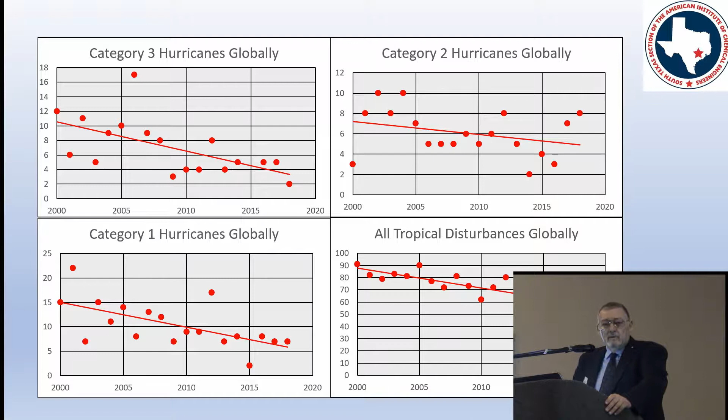So this is worldwide. Category 5 hurricanes are on the increase. Category 4 hurricanes are on the increase. Category 3s are dropping. Some of them must be turning into 4s or 5s. 2s are dropping. 1s are dropping. So what's the overall story? All tropical disturbances globally are dropping. Since the year 2000, we have about 30 fewer tropical disturbances globally. So that's curious. We're having more Category 5s and Category 4s.

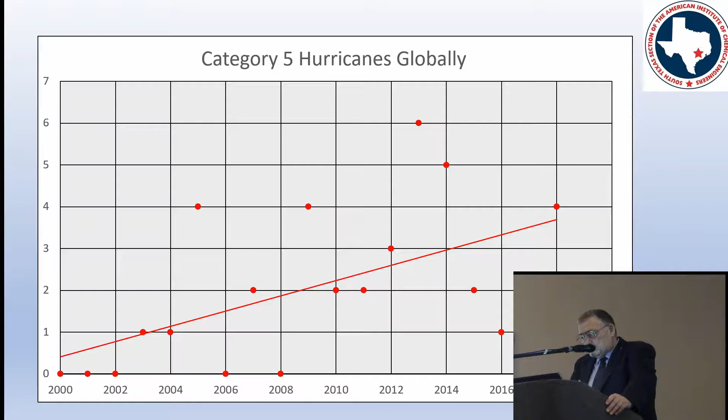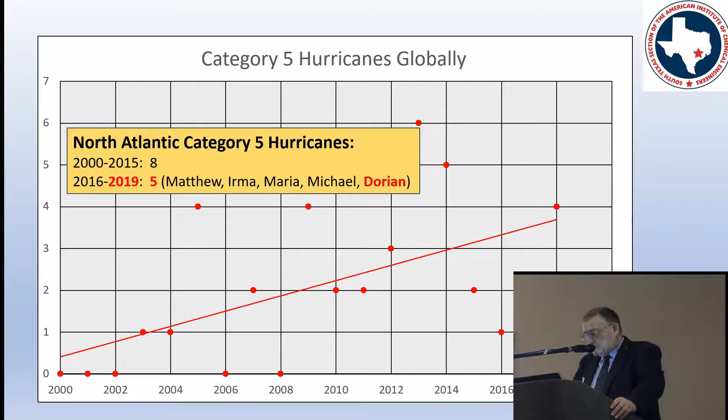These are the Category 5s from 2000 to 2018. For the first 16 years, we had 8. For 16, 17, and 18, those 3 years, we had 4. Throw Dorian in, and we've got 5 over the past 4 years, and of course we're not done yet this year. The reason, when I first saw Dorian way out in the Atlantic, I thought, my gosh, that has a long path length to get to the States. There's a lot of warm water out there.

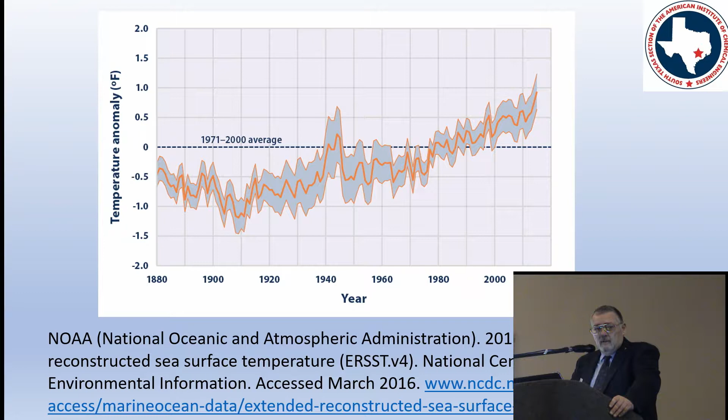Look at this increase in temperature just since the 60s. It actually mirrors the atmospheric increase in temperature pretty closely. That's about, it's over a degree, maybe about 1.4 degrees. So if we have a long flow path length for a tropical disturbance, you can guarantee, I think you can put some money on it, it's going to be a bad storm.

Now I want to talk about where we're at in climate solutions. You may know that I, along with some colleagues, got the approval of the Board of Directors of the American Institute of Chemical Engineers last October to form the Climate Solutions Community. Well, it takes a long time to get something done at a global level, and headquarters has a lot of things on their plate. So it's slow. So I and several colleagues locally, not all chemical engineers, there's a physical chemist, a couple of petroleum engineers, and there are 12 of us to start with. Now there's 18. We formed Climate Solutions for Texas. I'll tell you a little bit about what we're doing.

An engineer from Nigeria came to a Climate Solutions workshop in New Orleans at the spring meeting. He went back and started Climate Solutions for Nigeria and is seeking government approval as a non-governmental organization. In July, I attended a Carbon Management Technology Conference in Houston, met an engineer from Illinois who just had an urge to do something about climate change. On his own dime, he came down. He's sort of a semi-retired guy. My wife and I happened to go up there in the Chicago area in August because my wife is from there, and I met with him, and he is forming Climate Solutions for Illinois.

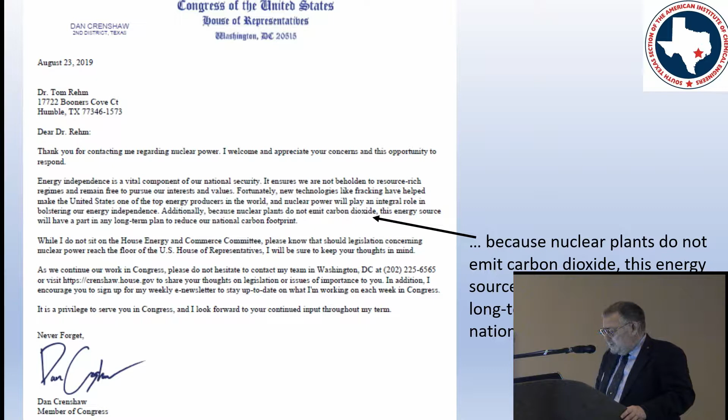I just want to point this out, and I'm going to show you in just a minute that headquarters is in line with us having a political stance. About a year ago, I spoke with Dan Crenshaw. I'm in his congressional district. He's the guy with a patch over his eye, and he asked me, why don't we use nuclear for baseload? And so we talked about that, and there was a town hall meeting just a week or two ago, and he sent me this letter afterwards. He's a Republican. I hope he leads.

Well, it's hard to believe, but this is an email from a lady who's on the AIChE Public Affairs and Information Committee, and she wanted to know what we do regarding government relations in our section, and I didn't think we did anything, and I learned that in previous years we had involvement. So it's interesting to me that they are encouraging that.

When Climate Solutions Community launched in the spring, on March 31st, the AIChE issued a press release, and this was part of it. A key task assigned to the Climate Solutions Community Steering Committee will be to develop a portfolio of technical and government policy solutions necessary to address both industrial and societal challenges related to climate. So we've got the okay to get into policy. Of course, they want some oversight over that.

Whew. That was all I had on climate solutions. I tried to get through it fast so we can get on to other stuff.

Southwest Process Technology Conference. If you haven't registered for it, you're in luck. All those here tonight are going to get a break on the registration. I'll explain that in a minute. It's local to Houston this year, Sugar Land, so we're hoping for a big turnout. There are going to be 9 sessions, as you see there. One of them climate solutions.

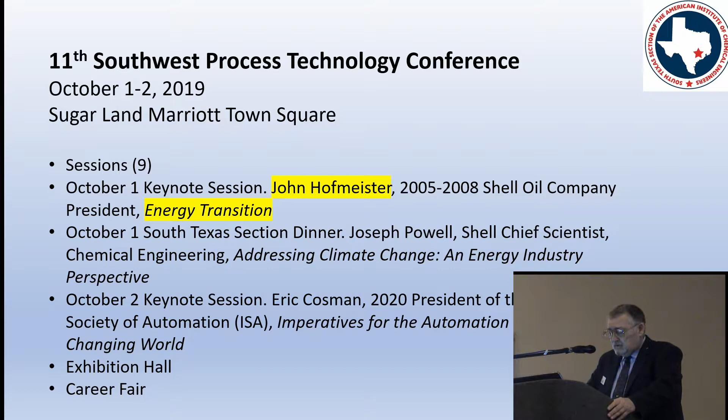Our keynote speaker the first day is John Hofmeister, the Shell Oil Company president, 2005 to 2008, and very, very concerned about climate change. And he's going to talk about energy transition. Joseph Powell, one of our section members, Shell Chief Scientist in Chemical Engineering, is going to speak at our October 1st dinner meeting addressing climate change, an energy industry perspective. And October 2nd, Eric Cosman, 2020 president of the International Society of Automation, is going to speak about automation. And we'll have an exhibition hall and a career fair.

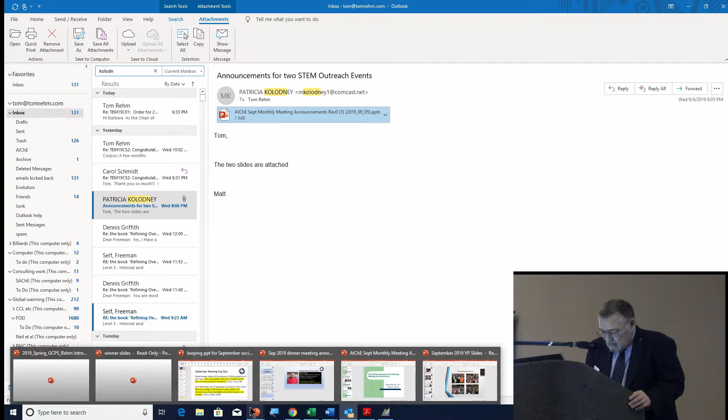Let's see. Yeah, well, okay. Let's see how we go forward. This one here. Okay, yeah, thank you. Okay, well, thanks, everyone.

We have two K-12 outreach activities coming up. The first one is going to be the Sally Ride STEM Festival, Saturday, October 12th at Rice University, and you can see the hours.

Wait, why does this keep moving? Okay, I'm the contact person for it. These are a couple of pictures. We get girls from basically middle school age, and it's great. You get to work with them; here's a picture from a couple years ago.

And then the other is Energy Day, that's the Consumer Energy Alliance, and it's going to be at Sam Houston Park downtown. The lunch and parking costs will be reimbursed. This is the chair of the Consumer Energy Alliance, inviting our volunteers back to the event. Last year we had about 1,000 kids come through, and we had a great time showing them our exhibits. So anybody who's interested in either of those, please get in touch with me.

Thank you. Okay, thanks, Matt. Okay, so I'm going to put up the speaker's presentation and then introduce him here. Okay. What did I forget? I know I got it on here, Mike. There it is right there, it's on my desktop.

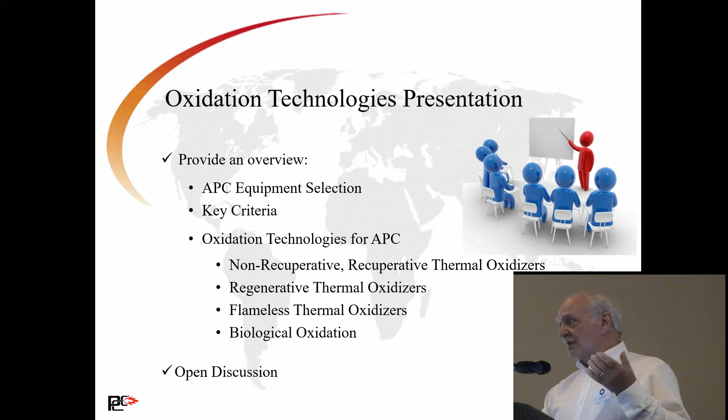Our primary focus is the treatment of VOCs, volatile organic compounds. Along with that, we have to look at NOx, SOx, and all the various offshoots and byproducts of combustion technology. But the technology's primary purpose is to put our customers or end users in compliance.

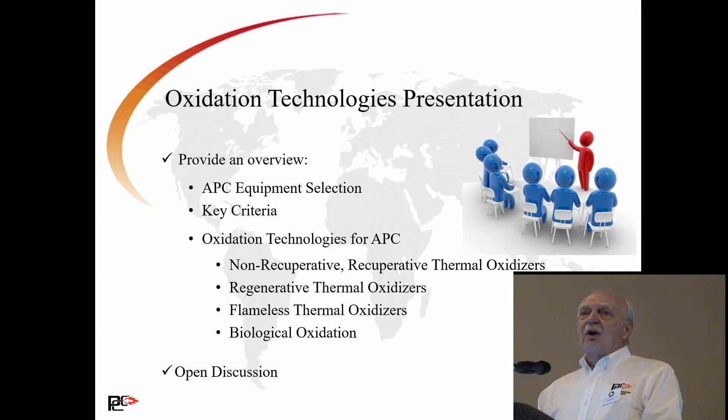So really, when you look at APC equipment, one of the key things you have to consider is the temperature at which oxidation or combustion will take place. It's easy to determine that temperature. You can look up the compounds. You take that complete list of compounds found in the airstream, and the first thing you do is identify the worst case - what is going to be that highest temperature needed to achieve the destruction you need?

Now, the second part is, okay, I know the temperature, but what technology, what system, what methodology do I use to achieve that temperature? That's as critical, or probably more critical, than the temperature itself, because there are a lot of different ways of getting to that temperature. Nowadays we have to concern ourselves with fuel efficiencies, NOx emissions, SOx emissions, greenhouse gas emissions. So the old days of just a burner and burn it out, the flame in the can - there's a lot more that goes into it than there did 10, 15, 20 years ago.

So really what you're looking at is you want to design a thermal oxidizer that's configured such that it promotes the total reaction of the air pollutants plus oxygen at an elevated temperature. What this does is result in total elimination of the waste compounds, and you end up with carbon dioxide, water, and some heat.

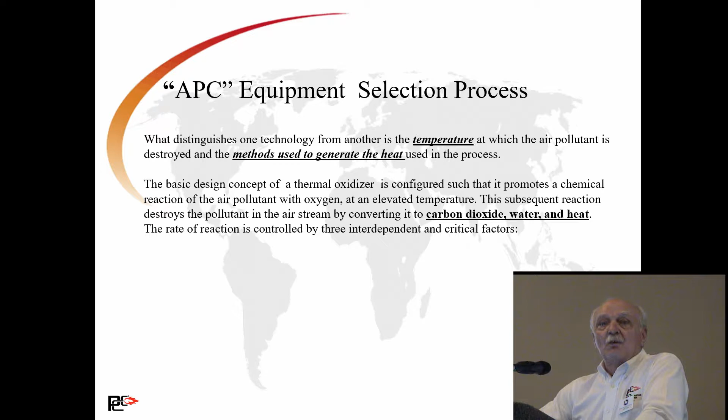So when we look at this, there are really three criteria we concern ourselves with. This is called the 3 T's of combustion, and they're common regardless of what technology you're using. The first is time - how much time at temperature does it require for your oxidation or combustion reaction to take place? Very critical, because time is the primary element in determining the size of the system, and size relates to cost, as you can imagine. The next is temperature - we talked about temperature, okay?

You have to be at a given temperature, sufficient enough to promote a complete oxidation or combustion reaction. The third is turbulence or mixing. And in a lot of cases, this is the one area that is often overlooked, or not as much emphasis is put on it. If we don't properly mix that waste gas stream with the air or supplemental natural gas we're adding, we're not going to have a complete oxidation or combustion reaction. And if we don't have a complete reaction, two things happen: we're not going to hit our performance, the destruction removal efficiency we're looking for, and we're probably going to consume more supplemental fuel, resulting in a higher operating cost. So the 3 T's are really, really critical: time, temperature, and turbulence.

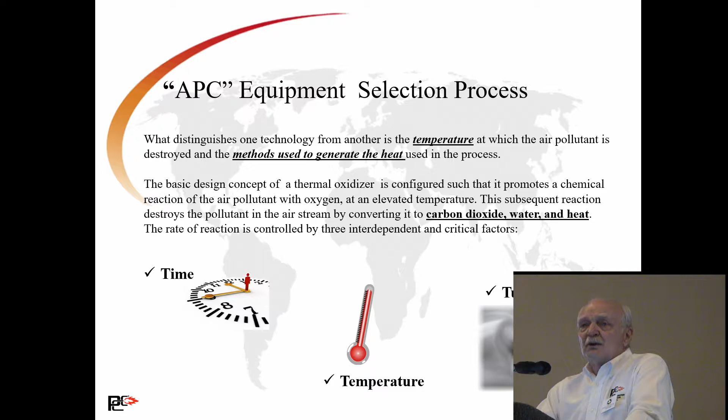So when we look at the basic design criteria for most thermal-based systems, you have a temperature of 1400 to 2200 degrees F. It's not often, unless you're using a catalytic oxidation system, that you're going to be below 1400 degrees. There are instances when you need to be over 2200 degrees. The average is probably in that 1500 to 1700, maybe up to 1800 degree F temperature range.

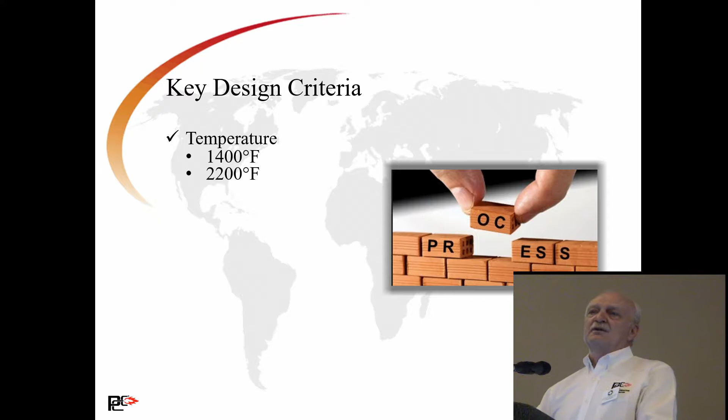Residence time: when we look at residence time on most conventional technologies, you're going to find that it ranges from half a second to 2 seconds. So this is the time that you're in the combustion chamber, or the area where the actual combustion or oxidation reaction takes place.

Gas velocity, anywhere from 15 to 50 feet per second. In some cases we can go higher. Other suppliers, depending on their design and how their systems are set up, can go higher. But this is pretty much the typical range.

To complete the oxidation reaction, you have to have a minimum of 2% by volume oxygen present. If you don't have oxygen present, you're not going to complete that oxidation or combustion reaction. So this is the basic design criteria utilized when designing a system. You need to determine that temperature, look at how much time it's going to take to fully oxidize and combust those compounds, have oxygen present, and make sure you've got good mixing.

This is applicable across all of the basic thermal oxidation technologies. A lot of this applies when you get into biological systems as well, but you look at it a little differently, and the operating parameters are totally different. You couldn't have a biological system operating at 2200 degrees F - there would be no bugs alive at that temperature, at least none that we work with.

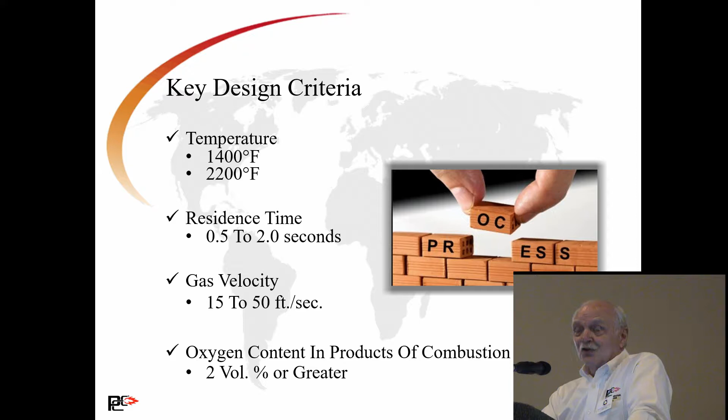So in the simplest of terms, what is a thermal oxidizer? Typically, when we refer to a thermal oxidizer, the most common term is a direct-fired thermal oxidizer. So a thermal oxidizer is a thermal reactor where pollutants in a waste stream are heated in the presence of oxygen to a temperature sufficient enough to convert the pollutants to harmless compounds - once again, carbon dioxide, water vapor, nitrogen, and oxygen.

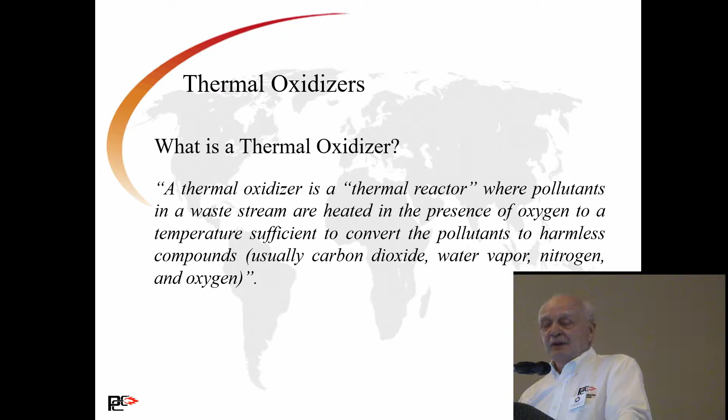So when you look at this in the very simplest of terms, really what you have is a flame in a can, okay? You have a fuel source, a burner, you add supplemental oxygen, you bring your waste gas stream in, and you create a scenario where you're properly mixing that. Your combustion chamber, the flame, burns into the combustion chamber. The combustion chamber is sufficient enough to give you the required retention time that you require, and then you exhaust to atmosphere. Very simple, very basic.

They can be extremely complex. It depends on the compounds being treated. If you have very low NOx requirements, there are various things you can do to the flame in the can, so to speak, to reduce the NOx. One of the big issues is they're not the most efficient in the world from a thermal fuel usage standpoint, and one of the reasons for that is you're generating a lot of heat, but you're not doing anything to capture that heat. So that's one of the areas.

One of the big advantages of a system like this is you can achieve 99.99% removal efficiency - very, very important. A lot of permits are written and require that 99.99%.

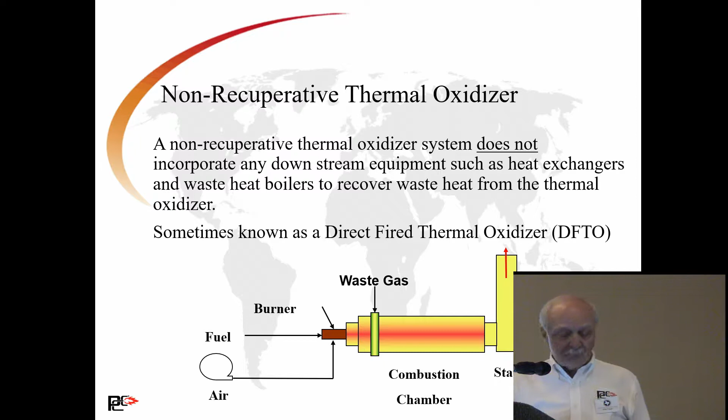When you look at typical applications, you want something where the waste stream is exothermic. In other words, the waste gas typically has a relatively high BTU value, so you're not supplementing it with a lot of natural gas or other auxiliary fuel. The stream can be wild, meaning there can be a certain amount of variation to it. A lot of auxiliary fuel is not needed. You're really not concerned with the materials of construction—they can be loaded with particulate, they can be dirty. You just don't have a lot of concerns for that.

Fuel is typically not a major concern with the customer because they're either going to burn fuel or augment it with fuel. Due to the lower efficiency levels, the real concern here is removal efficiency and meeting their permit requirements.

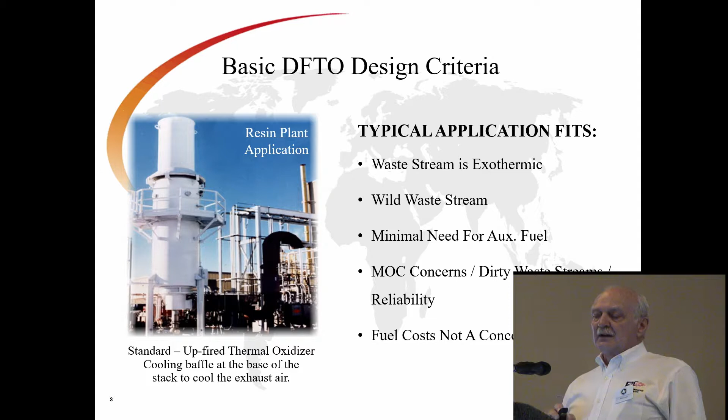Now keep in mind that you're evacuating 15, 16, 17, 1800 degree heat to the atmosphere when running a direct-fired thermal oxidizer. So what most people and most systems employ today is some sort of recuperative technology, where you take the waste heat that's being generated and do something with it. The most common application is a waste heat boiler.

Just about every factory uses steam in their process in some form or fashion, and most of them are burning natural gas to generate that steam. So if you take the waste heat coming off of a thermal oxidizer and run it through a waste heat boiler, you're now utilizing that heat to generate steam. You're able to either shut down that natural gas burning boiler, or augment your steam capability within your factory. So now you're utilizing that heat to do something else—steam is the most common.

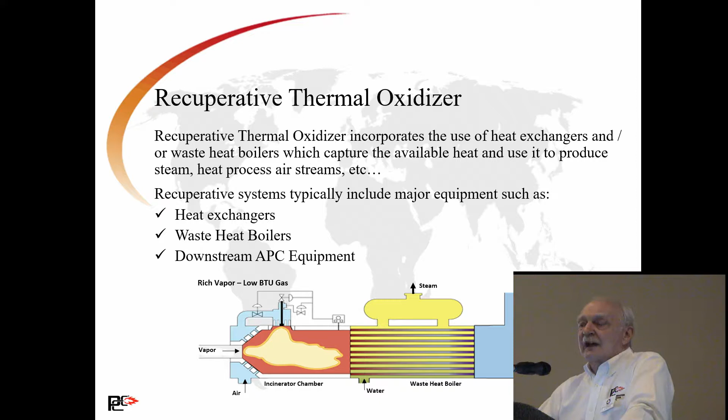You can preheat the air to reduce the delta T required to bring that waste gas up to temperature. You can have air heaters in the asphalt business or roofing business—they use oil heaters to preheat the asphalt itself. So they're not using some ancillary heat; they heat oil lines, put it into the vats of asphalt, and heat it that way. There's a tremendous number of uses for that heat, and a lot of different equipment out there. Once again, waste heat boilers are probably the most common that you'll find on thermal VOC removal or thermal oxidation technologies.

The typical application would be one where the waste gas is either exothermic or endothermic. You're really not as concerned with a high BTU value, because if you're supplementing it with auxiliary gas or fuel, you're achieving a benefit—utilizing that heat to do something else within the factory. Obviously, you're not going to add a waste heat boiler or other ancillary equipment if the customer doesn't have a use for it. They're very expensive, and oftentimes a waste heat boiler can be as expensive as the thermal oxidizer itself, depending on the size and how much steam you're trying to generate.

The application should not present an unmanageable fouling or corrosive concern. The obvious reason is you're using a heat transfer technology. If you have a lot of particulate or other compounds that foul the thermal transfer capability of the auxiliary equipment, you'll lose that heat transfer capability and minimize its overall effectiveness. So you want a relatively clean, non-corrosive airstream going into that ancillary waste heat recovery system.

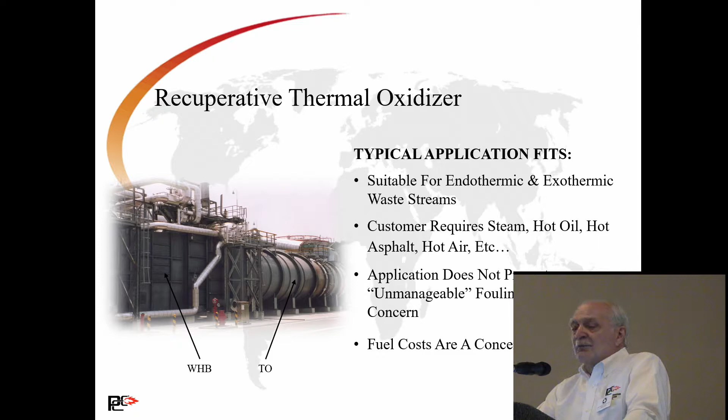Typical, that's a duplicate, sorry.

Okay, the next technology is what we call a regenerative thermal oxidizer, or more commonly known as an RTO out in the field. RTOs are similar to a standard direct fired, but really what we're doing is we're capturing the heat and we're going to utilize that heat. And as a result, they're very, very thermally efficient. They're 95% thermally efficient. The best you're going to get, even with a recuperative thermal oxidizer, is maybe 80% heat recovery or thermal efficiency. Here, you're at a 95% thermal efficient.

They're typically used for high volume airflows at low volume concentrations of VOCs. So typical applications most people would be familiar with are paint booths in the automotive industry, where you have hundreds of thousands of ACFM of air being moved, but very low VOC concentrations, because there's a lot of scrubbing and a lot of recovery that takes place, but you do have low volume VOC.

In the engineered wood products, your OSB, your MDF, your plywood, your particle board applications, once again, on the press and dryer vents, you have very, very high airflows, ranging from 100,000 to, I've seen it as high as 400,000 CFM, but you have very low VOC content. So these systems are a natural for that. They're very, very, very effective.

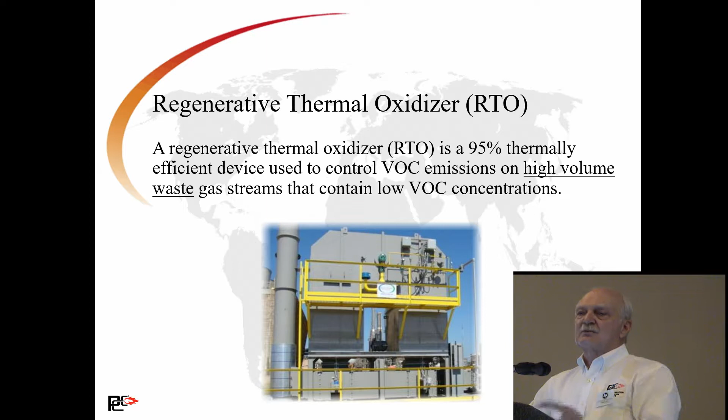So really, when you look at a regenerative thermal oxidizer, what you have is an oxidation zone, and your oxidation zone is basically a horizontal thermal oxidizer, so to speak. You have a flame, you're heating that oxidation zone or that combustion chamber up to a temperature that's sufficient enough to remove the compounds in the air. Let's say it's 1400, 1500, 1600 degrees F.

This is where you start to get different from the more conventional systems. Now you have two zones that are made up of ceramic beds. They can be a block ceramic bed, or they can be what are called saddles, so just random pieces of ceramic that are put into the beds. These are heat recovery beds, so you're recovering heat and you're releasing heat, and that's the purpose of these beds. So once again, you're either going to recover heat or you're going to release heat, okay?

The next thing you have are switching valves, and there's all types of switching valves used in regenerative thermal oxidizers. Probably the most common are called poppet valves, but there are indexing valves, there's rotary valves, there's all kinds of valves. But the key is it's a valving mechanism that switches the airflow.

So you're going to directionally change the flow of the waste gas, and you're going to move it from one side to the other. A typical indexing or cycling would be in the order of 45 seconds to 3 minutes. And it all depends on the construction of the system, the compounds you're treating, the heat requirements, and the heat transfer capability of the ceramic media that you have in the system.

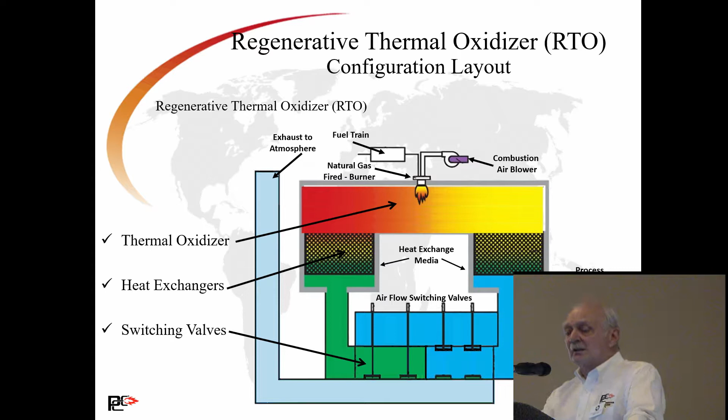So when we look at a flow diagram, initially when you start the system up, you're going to preheat that ceramic bed, in this case in flow 1, so ceramic bed 1, which would be this bed here. So as the waste gas enters, the valve diverts the waste gas into ceramic bed 1. That bed is hot, okay? It's probably 900 to 1,000 degrees F, okay?

What happens is your waste gas is at an ambient temperature, whatever that might be. So what we want to do is preheat and draw heat from that bed, transfer that into the waste gas. So now we're elevating the temperature of the waste gas as it goes into the combustion chamber. So we may have that waste gas at 700, 800 degrees going into that combustion chamber, so you have considerably less delta T, or temperature change, to reach the combustion temperature.

Okay, the gas then exits the combustion chamber. Now it's hot. It's at 1,500 degrees. You now transfer the heat from that waste gas into the secondary ceramic bed. Now what you're doing is you're heating that bed up to that 700, 800, 900 degrees.

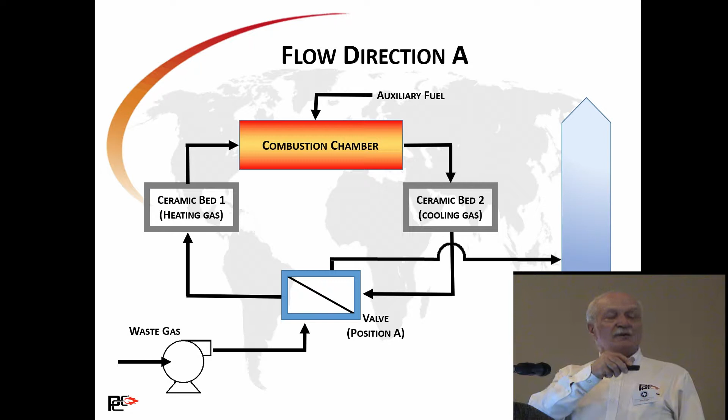Okay, and then you come down and you go back out and you exhaust to atmosphere. So that's cycle one. Now what you do on that cycle, which like I said, could be a minute, could be 3 minutes, it depends on the sizing and the total operation of the system. But now what you're going to do, you're just going to reverse this.

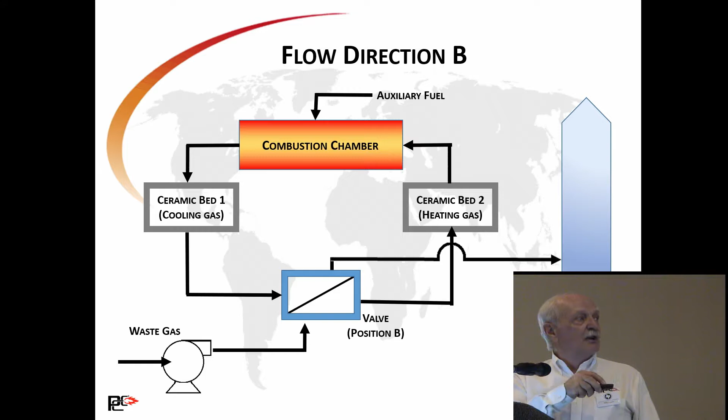So now we're going to go through ceramic bed 2, because that bed's hot. We cooled ceramic bed 1 down. So now this bed's hot, so we cycle up through here, do the same thing. We preheat that waste gas, bring it up to temperature, reduce that delta T. We come back out, we exit through the second bed, or bed 1 in this case. We heat that bed up to the maximum retention temperature that we're going to achieve.

So we cycle back and forth. This happens every minute, every second that the system is in operation, you're cycling on that 1 minute to 3 minute cycle. Here's the big issue with this system. Most systems are earmarked at 98% removal. That's the common that you'll see. You're starting to see a lot of systems that will be billed at 99% removal.

You're not going to get an RTO to do greater than 99% removal. It's not going to happen without, well, I guess if you added enough sections to it and had something that was just massive, you might be able to do that by capturing everything. But what happens with the system is, when you go through the valve, no matter what that valving system is, those valves switch on about a half-second cycle.

So when it switches, it's switching in a half-second, but you have enough waste gas that is exiting the system that's untreated, and that's called puff. Very common term, it's called puff. And there's enough of that waste gas exiting the system that you cannot achieve over 99%. So that's one of the downsides to the system.

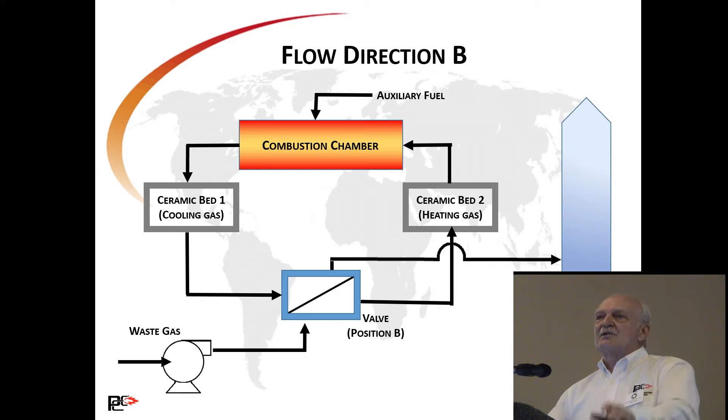And believe it or not, if you're in the business at all, 99%, 99.9, 99.99, these are decimal points, tenths and hundredths of a percent. But that's what permits are written at, and that's what's required. If your permit's written at 99.9%, you have to achieve 99.9 or better. So you have to understand that. And so when you talk about systems of these types and these 0.9s, it's critical. They have a place, they have a use, there's a need for them.

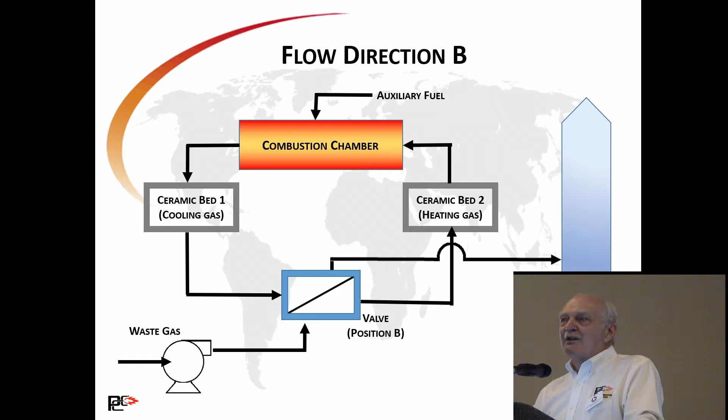So once again, you need to be a high volume, low VOC concentration. You have to have a clean waste stream. We have a ceramic media in there, it will plug. So if you have particulate, if you have silicon-bearing compounds, you can literally glass that media over. So it's got to be a relatively clean waste stream. It's got to be, for the same reason, a relatively non-corrosive waste stream. And you have to determine the quality and the composition of the silica and the silicone within the ceramic media to ensure that you have the proper media in there.

The other thing that's really, really important for an RTO is you have to have a very consistent waste stream. Not a lot of variation. So it's got to be pretty much the same volumes, the same composition day in and day out. And that's where the applications best fit. A wood products application is the same every day, minimal variation. A paint booth application, minimal. Believe it or not, RTOs are used in bakeries, treating ethanol alcohol that comes from the fermentation process and the baking process.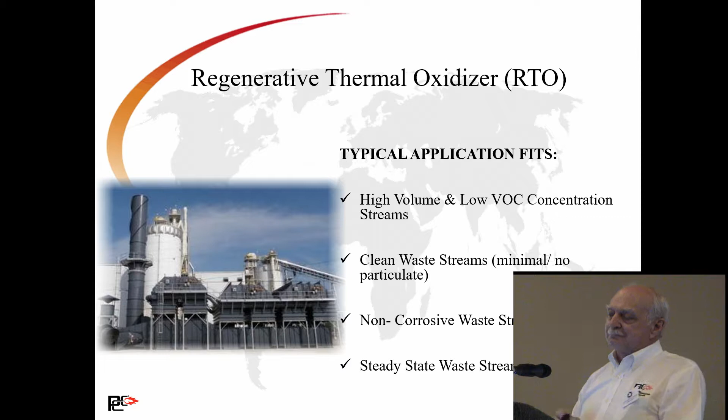They're very consistent. So those are some of the typical applications. So now we're going to get into, we've been talking flames, we've been talking a flame in a can. No matter how you looked at it, it's burning. You're doing something with a flame.

So there's a technology out. It's been out actually for probably 20 years plus. And there was a lot of activity 15, 18, 20 years ago, and then, due to acquisitions of the original company that developed the technology, it kind of got tabled, shelved, and now in the last couple years it's resurfaced.

The president of our company was one of the co-developers of this technology back 20 years ago, and we have made some modifications to it. There are a couple suppliers out there that sell this technology. Not a lot of difference between the two systems, but there are subtle differences.

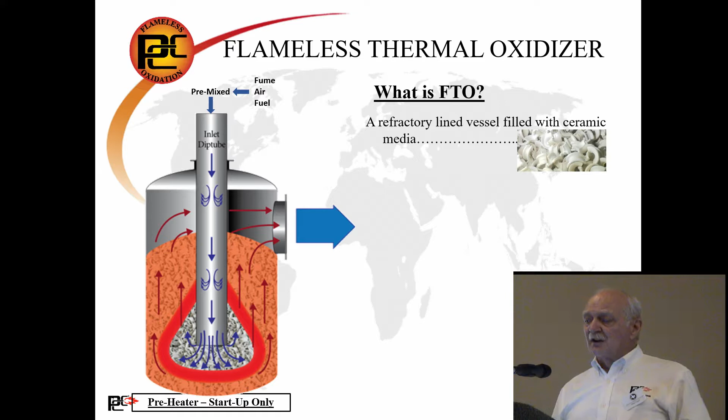But basically, what I want to do is just bring you up to speed on what this technology is from a very generic standpoint. In the simplest of terms, a flameless thermal oxidizer is a refractory-lined vessel. So you've got a vessel that has refractory or an insulation in it, and it's filled with ceramic media. If you can see from the picture, that's a saddle media. Typically, it's a little higher quality, a higher grade than what you would find in a regenerative thermal oxidizer.

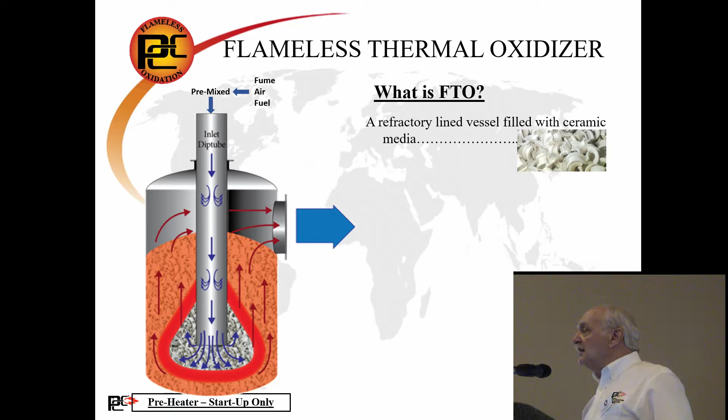So how does the system work? Well, first off, the only time the system will actually see a flame is during the preheat or the startup phase. You have to bring that bed up to 1,400 degrees minimum, which is the temperature that we like to see it at. So you have to have a flame to get it up there. I guess you could put electric heaters in, but they're much slower, much more costly, and are going to take probably a lot more time.

So on larger systems, we use a flame. You have a burner in the bottom, and basically you're just preheating that bed. Once that bed's up to temperature, you start the process. You turn that heater off, and you never turn that heater on again unless you've done some sort of shutdown. Because even if you shut down for a small amount of time, that bed's going to stay at temperature for hours and maybe even days in some cases, depending on your operating temperature, because it's a glowing bed of ceramic.

One of the things that really allows the system to operate and contributes to some of the key advantages this technology has is the utilization of a series of analyzers. So we pre-analyze and then we pre-mix the waste gas. We'll look at the waste gas coming in, and you can throw anything you want at it. You can mix everything in the plant and throw it at it, or you can run 3 different lines today and tomorrow run 4 other lines.

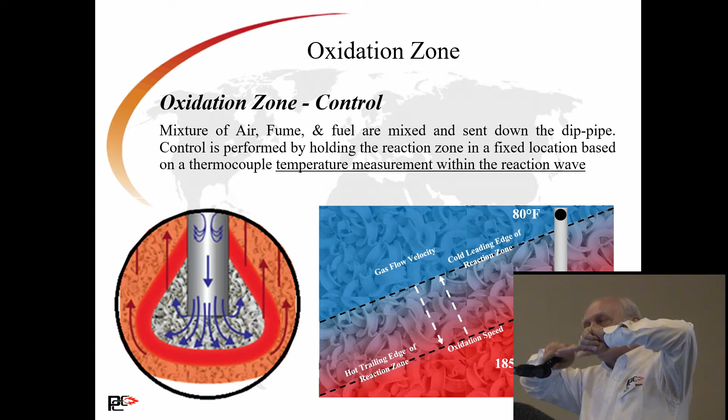But as that waste gas migrates out through that bed, it will start to increase in temperature because that bed is hot, and you'll hit what's called the oxidation zone. The oxidation zone is whatever temperature those compounds are going to oxidize at.

Now remember, I set the BTU value, so I know exactly what temperature they're going to oxidize at. I know exactly how far they're going to migrate out because I know the ambient temperature of that waste gas coming in.

And I'm monitoring all the temperatures in the bed, particularly the lower part of the bed, and I'm monitoring the temperature of that waste gas coming in.

So I control where that oxidation zone is, and that's critical because I want that oxidation zone to be maximum, so I have the maximum amount of surface area for that oxidation to take place.

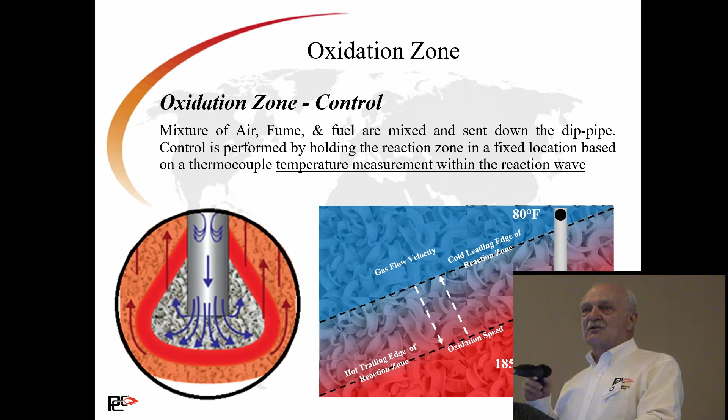And I don't want it moving around within the vessel, because if it moves to one side or the other, or up or down in the vessel, I'm not going to have a complete oxidation reaction, and I'm going to lose efficiency.

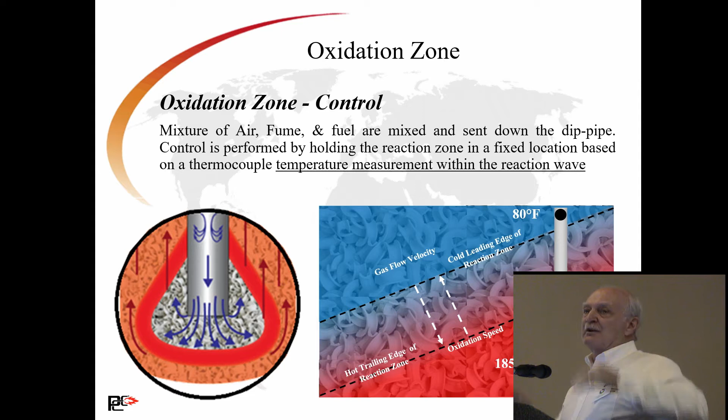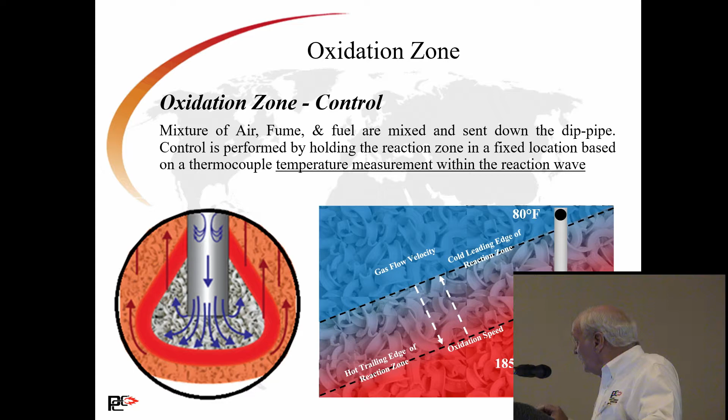So you start out with a cold bed. We have a heater, and we're going to bring that bed up to temperature. It's pretty basic—we're just heating up all that ceramic media within the bed.

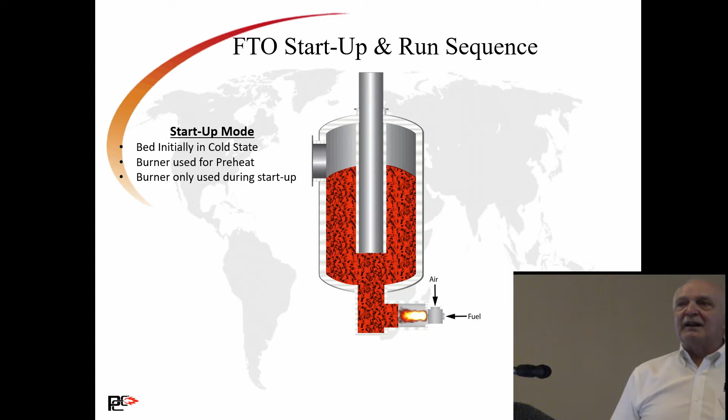When we go into the operation mode, this is where you'll see the waste gas come down the dip tube. It migrates out through that oxidation zone, and you completely oxidize those compounds—probably close to about as complete a reaction as you can get, taking place in that oxidation zone.

The rest of the gas then percolates up through that bed at 1800 degrees, so you have continued oxidation taking place. Anything left, anything not oxidized within that oxidation zone, will now be oxidized as it percolates up through the bed.

And even when you get to the head space within the vessel, that's just like a retention time, or like a combustion chamber—it's at close to 1800 degrees. So throughout the entire vessel, you have oxidation, or VOC destruction, taking place.

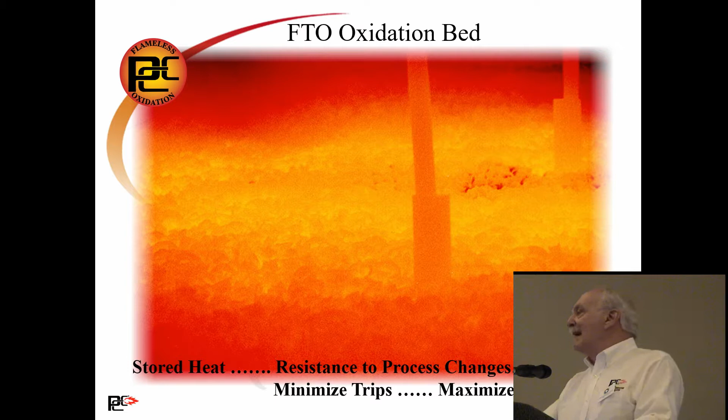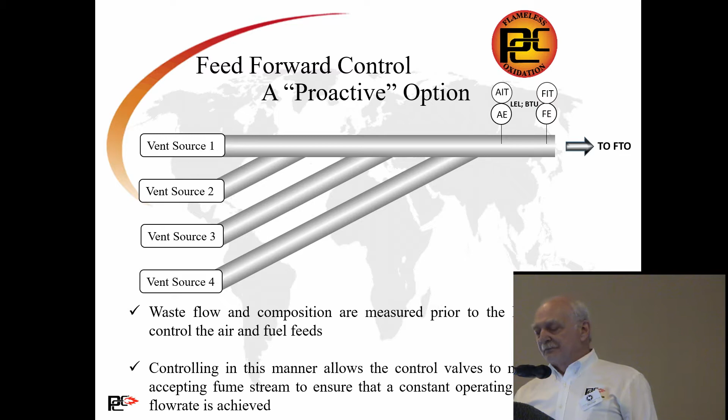So I was talking about feed forward, the controls, and the ability to handle multiple waste streams. In my way of thinking, and when I go out and talk to people, I'm finding that this is more important than a couple of the other advantages this system offers.

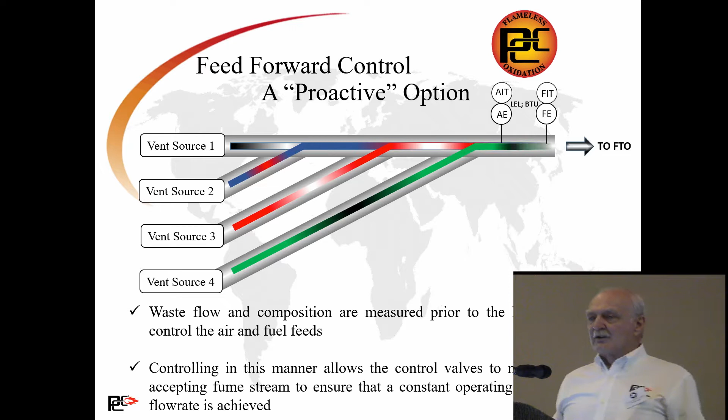Most major companies have multiple waste streams that they have to treat. They need a system that can handle this without having to do significant adjustments.

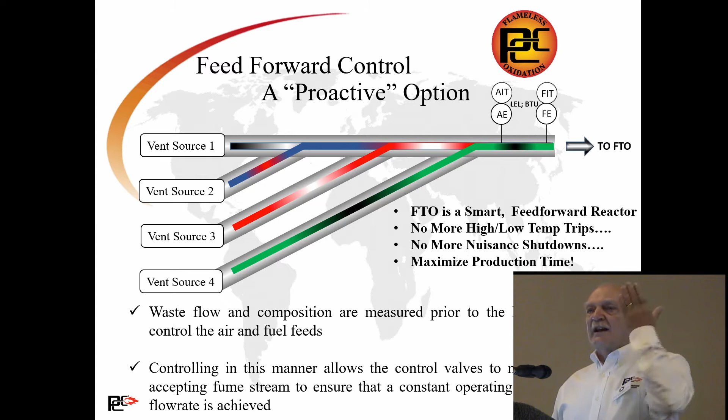A thermal oxidizer—when your waste gas is coming in and you know what it is, you set a high temperature trip, you set a low temperature trip. If for some reason you hit it with waste gas that has a high BTU value, what does it do? Temperature goes up. You hit that high temperature trip and it shuts down. Now you've got to go in, change that set point, account for that higher BTU value gas.

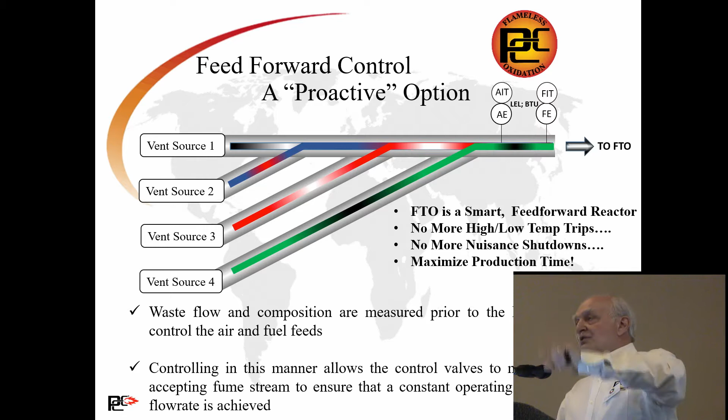Or conversely, if it was a low BTU value gas, it's going to cool down. Then you have to shut down because you're not destroying the compound. So now you're in big trouble, because now you're emitting non-treated VOCs.

Hence, you have a system that is very, very efficient.

We have a customer that spends $6 to $7 million a year in lost product due to high temperature trips. And that's a tremendous amount of money.

Now, when it trips, they get it back online as fast as they can, but that's a lot of money. This system will virtually eliminate that with the feed-forward control on it. So, to my way of thinking, it's a huge, huge advantage.

Are the NOx controls pretty steady with this too? Yes, and I'll go into that. Yes.

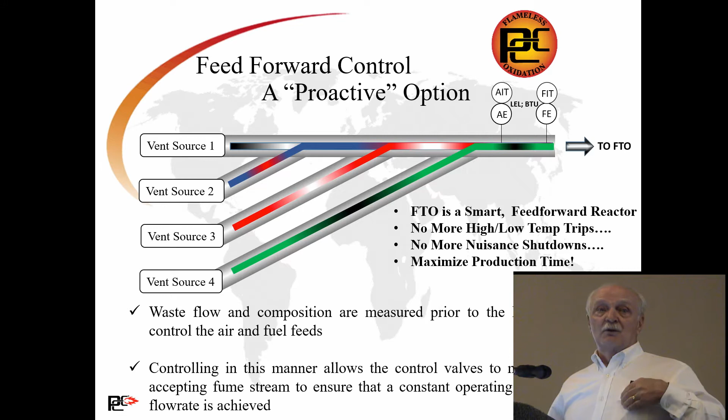What kind of recovery do you get out of that? Recovery of what's right here?

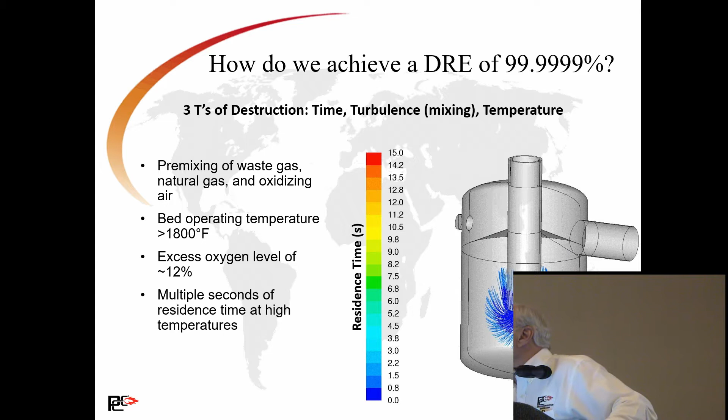We get 6 nines, 99.9999%. And if Will Huebner, the president and one of the original developers of this, was here, he would tell you it's 99.99997. You can't analyze for this, and that's what we tell him. We kind of laugh and go, Will, come on, you can't analyze for this. What happens is when you have a testing company come in, it comes out as non-detect. Non-detect is as good as you can get. They cannot detect anything in that airstream at all. So that's typically what you'll see.

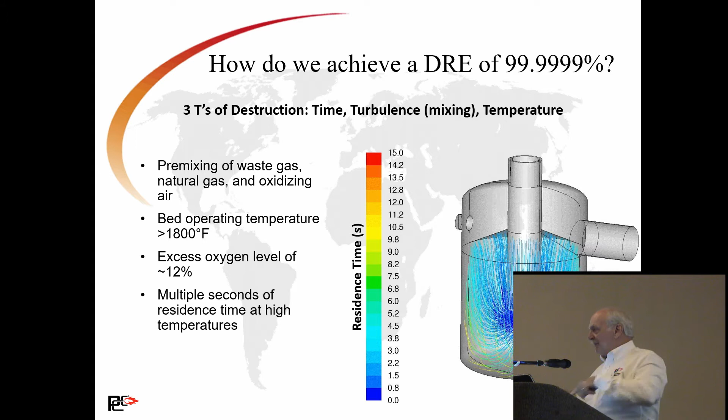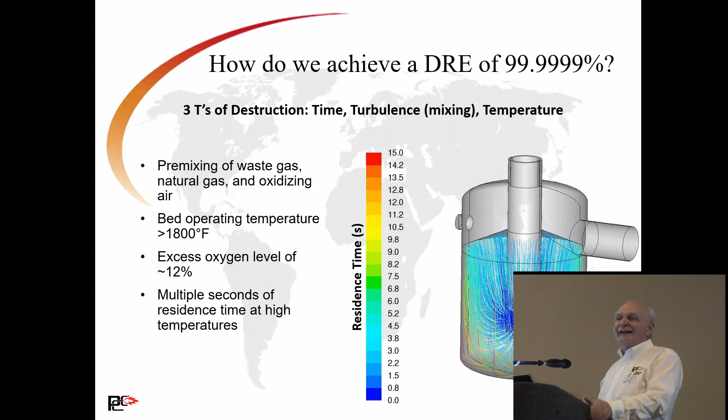Probably the biggest reason for that is, number one, setting up that oxidation zone and controlling it. But also, remember when I was talking about thermal oxidizers, we had a retention time of half a second to 2 seconds. In this system, you have a total retention time of minimum usually about 6 seconds, so you're significantly increasing that. As it percolates up through the rest of that bed, any residual left behind is effectively treated and destroyed. So we will guarantee 99. Flameless thermal oxidizers, no matter who builds it, will guarantee 6-9 removal efficiency. They're very, very efficient destructors of VOCs.

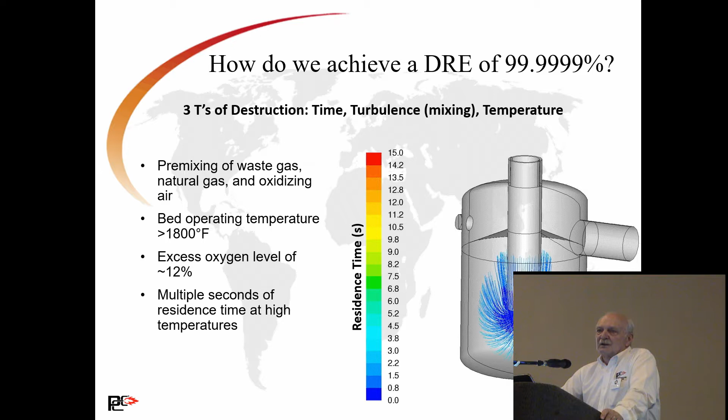So now let's talk a little bit about NOx, okay? Yakov Zeldovich, back around the turn of the century, did a lot of work looking at thermal NOx, okay? I'm talking thermal NOx, not chemical NOx. He discovered that at 2300 degrees F, you exponentially increase the amount of thermal NOx generated, and it's a function of the temperature, okay? So how do we achieve less than 1 part per million of thermal NOx? We will guarantee less than 1 part per million of thermal NOx.

Well, if you look at a standard thermal oxidizer, the burner in the can, that flame going in there, you may be operating at say 1,700 degrees in the combustion chamber, but what's the temperature of a flame? It's all over the place - 3,500, I don't even know what the low temperature would be on the flame, but you can go as high as 3,500 degrees. Now, low NOx burners have been designed and configured to bring those temperatures down so you more efficiently control NOx, so you generate less thermal NOx. But no matter what you do, you're going to generate thermal NOx.

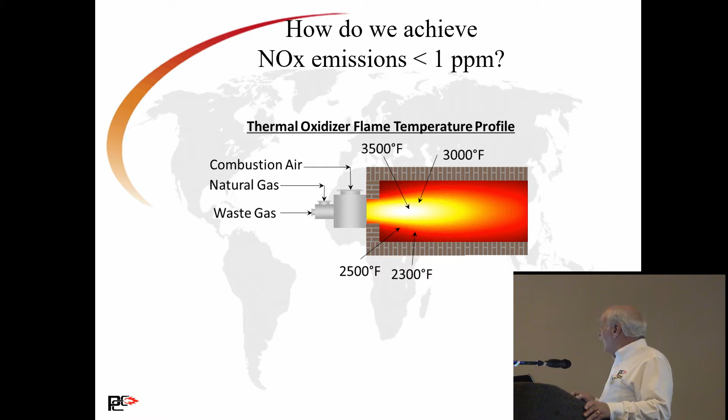Well, we operate at 1,800 to 1,900 degrees F. We do not exceed that. So there's virtually no thermal NOx created for all practical intents and purposes.

Now, chemical NOx, that's the other NOx. The problem with this system is any complex nitrogen-bearing compounds - because we're 99.9999% efficient, guess what we're going to do? We're going to make NOx. We're going to convert all those nitrogen-bearing compounds into NOx at a very high rate because it's so efficient. So we do not market the technology as it exists today for high nitrogen-bearing complexed NOx systems. Now, I suppose you could add an SCR and SNCR onto the back of this, but man, you're going to be removing a lot of NOx, so it depends on what those concentrations are.

The other thing I didn't mention is you can also add heat recovery to this. So on your exit, you could put a waste heat boiler, an air heater, so you don't have to evacuate or exhaust all that temperature to the atmosphere. But we do achieve, and we will guarantee, less than a part per million of thermal NOx. You have to look at the process when you get into the chemical NOx.

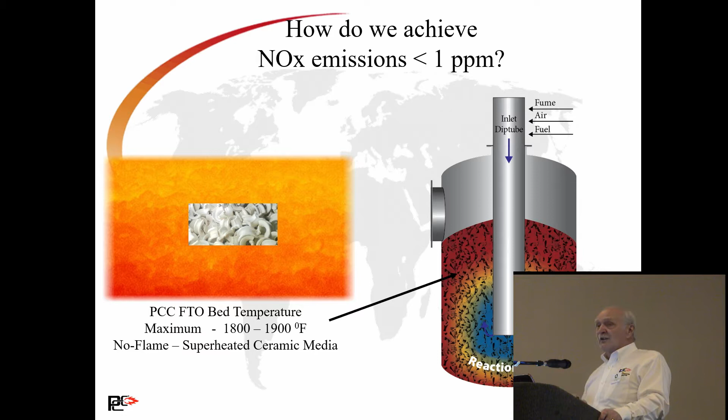This is a picture of a system that has been in service for 18 years. PCC didn't install this system, it was installed by the original manufacturer. But we do all the service work on this system, and we have been doing the service work for the past few years. It's a major pharmaceutical company in Ireland.

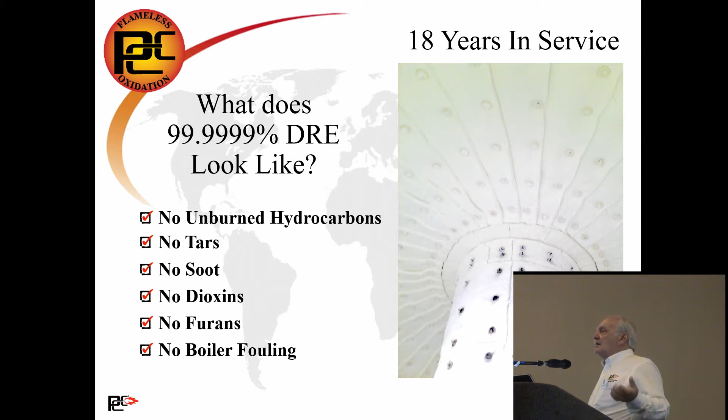What you see is the refractory. This is the dip tube. The black things are the studs that are used to hold the refractory onto the dip tube as it goes in. But this is what it looks like on the inside after 18 years in service. Nothing has been done to that refractory lining. Nothing. It's pristine white.

And if you look at it, this is what 6-9 removal efficiency is. There's nothing left in that stream. If you looked at a standard thermal oxidizer, even at 99.99% removal, you're not going to see a refractory that looks like that after 1 year, let alone 18 years.

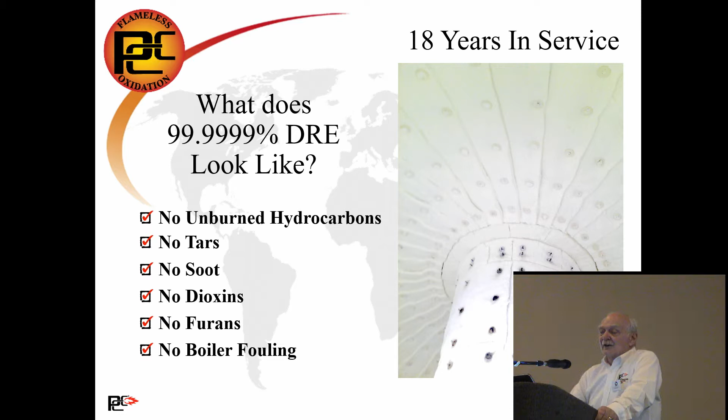So this is a picture of that system, the pharmaceutical manufacturer. It's been in business for 18 years. It's 14 feet in diameter, 20 feet tall. It's a very, very high flow rate. It's extremely reliable. And probably one of the key features here is, number one, when they permitted this, they permitted it as a reactor, not a combustion unit, not as a thermal oxidizer.

And that helped them get their permit, number one, because of that terminology, reactor. Number two is, in the life of this system, they've probably changed their primary product mix 5 times. They've never had to change the set points. They're operating on the same set points today that they did 18 years ago. Multiple changes in processes, multiple changes in compounds going through the system.

So that's key. The other thing is this system is located in the middle of dairy country. They need the 6-9 removal efficiency, and they're one of the few companies that needs that high removal. And the reason is, today they're making Viagra. And you can't have Viagra emitted out into a dairy field. Think about it, or don't think about it, whatever the case might be.

So they need that 6-9 removal efficiency. It's very, very critical to them. So that's our little story, we always like to tell that, and people kind of get a kick out of it. But for them, it's been probably one of the best air pollution control pieces of equipment they've ever installed. They have plans to install more of these systems as their requirements mandate this.

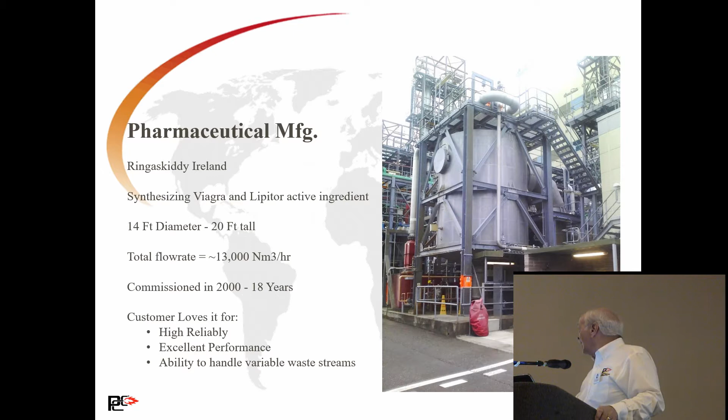So, key benefits: 6-9 removal efficiency, less than a part per million of thermal NOx, low operating temperatures, so you're at a consistent, constant temperature, and feed-forward control. And where it's applicable, there are emission reduction credits, because you're far surpassing the removal efficiencies and lowering your NOx levels down, you may be under your permit, and you may have excess credits that you can sell in your area to a company that is not so lucky. So there is value for those credits.

Okay, we're going to wrap up here with a few slides. We've been talking about thermal, we've been talking about heat, we've been talking about flames and heating up things to 1800, 1900 degrees. Now we're going to talk about Mother Nature.

So biological systems have been around for 100 years, primarily used for odor control, primarily used for wastewater treatment facilities. They're still used today. The early systems were the size of football fields. So really what they would do is they'd dig a pit in the ground, they'd put an exhaust plenum into the bottom of it. Sometimes they humidified the air, most of the time they didn't.

They would pump the air through the plenum. It was covered with a bed of compost, usually a wood compost. The air would percolate up through it, and lo and behold, there'd be no hydrogen sulfide, that rotten egg smell. So very, very efficient for a while.

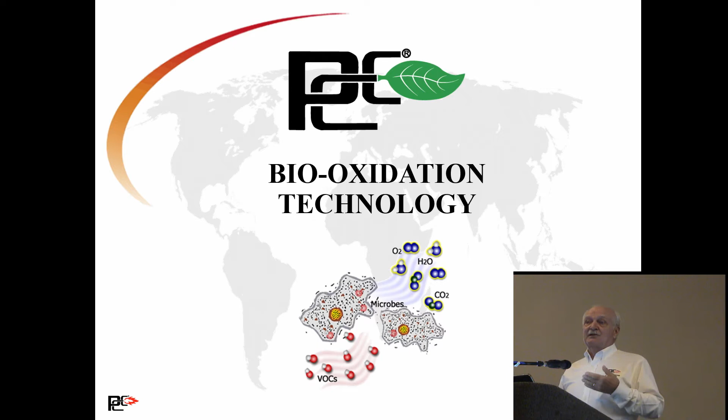So that's the key part. So what is a biooxidation system? Really, in its simplest terms, it's a multi-stage process where you're transferring the waste gas from the air phase and getting it into the liquid phase.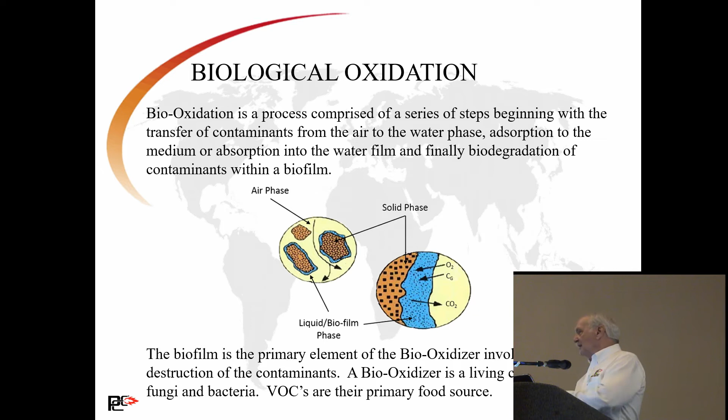Once you get into the liquid phase, it's just like treating any waste in wastewater treatment plants. Everybody knows that technology, it's very common with municipalities and industrial wastewater. If you can get it into the water, in most cases you'll be able to treat it. So you do that either through adsorption onto a media film or absorption into a water-based film.

The primary element within the biooxidation system is the biofilm that's generated, and that's a living colony of microbes, naturally occurring microbes. These aren't engineered, they're naturally occurring.

Keep in mind, the waste gas is a food source, and if you think about basic biology, the microbes will speciate to the food source. There may be hundreds or thousands of microbes in that system initially, but once you put the waste gas into it, the dominant microbes will be those that speciate to those compounds. It's just food—they eat it, digest it, consume it.

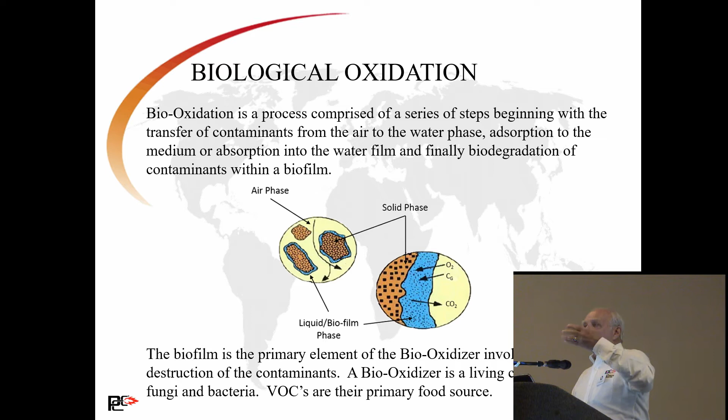Water-soluble compounds are degraded in the liquid phase. Compounds that remain in the gas phase are then digested and consumed on an inorganic media that has a high amount of surface area and grows a very thick, water-miscible biofilm that the compounds transfer into and are digested.

We do add a fertilizer, basically—it's Miracle-Gro for all practical purposes. The microbes like high nitrogen, high phosphorus content, so it's a good way of supplementing them because we want them to be as active as we can possibly have them.

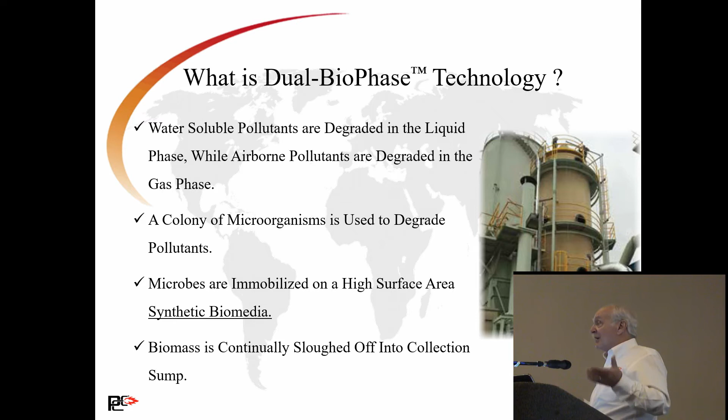So in the simplest of terms, the air enters what we call the absorber section. The absorber section is water recirculating through a cooling tower media, very open-faced, large cooling tower media at about 1,500 to 2,000 gallons per minute. You're really flushing that first chamber with a high volume of water so we can knock out as many of those water-soluble compounds out of the air, getting them into the water phase.

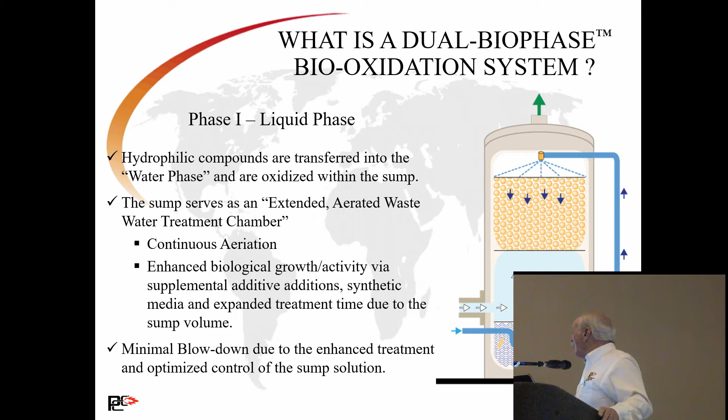As we pass up through the second bed, it's an inorganic media with reticulated foam in it, where we create a massive amount of surface area. It's like a sponge with a lot of porosity in it—we create massive amounts of surface area for the biofilm to grow on.

So here's the key to biodegradability. You can't treat everything biologically, or we would use biosystems for everything. You can do it, but the system would be the size of the arena over here, and it would cost a fortune because you'd need significant retention times.

So when you look at your aliphatic hydrocarbons—your methanes, propanes, butanes—they go right through the system, you don't touch them. The key is the more water-soluble compounds. So if you get to your alcohols, aldehydes, ketones, ammonia, hydrogen sulfide, as long as they're not at levels high enough to be classed as a biocide and kill the bugs, these are the systems where you're very effective. You can get 90, 95, 98, 99% removal efficiency on these sort of compounds.

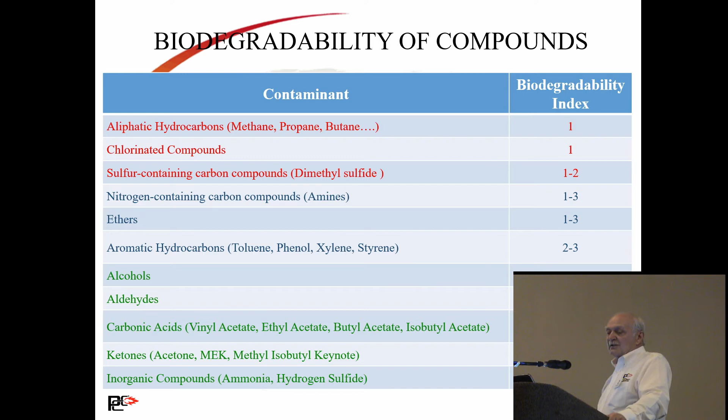One of the key things is we compare this to an RTO. We sell RTOs, but we sell these systems as well. When you look at a wood products application, either system can achieve similar removal efficiencies. The key here is you're turning off the natural gas, which is 60% of the cost.

You shut the natural gas spigot off—you're generating no NOx, 90% less greenhouse gas, no SOx. You're giving off a little bit of carbon dioxide, and the only reason is because the bugs are alive just like we are. We give off carbon dioxide, they're going to give off carbon dioxide. So there's a real cost advantage, particularly where the application makes sense.

So this is how we like to close this presentation out.

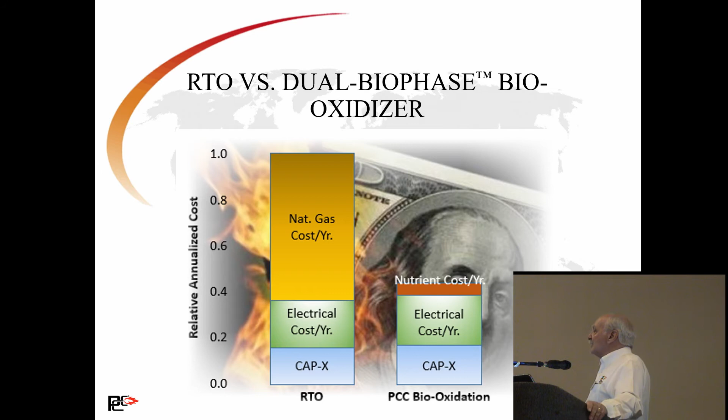We talk about NOx removal versus total VOC removal. We didn't talk about flares, but everybody knows what a flare is—they're all over the Houston area, the flame burning at the top of a stack. Those are tip flares. They're not real efficient from a total removal efficiency standpoint, and they're not real efficient from a NOx standpoint. They have their place, they have their use.

There's a lot of legislation starting to take place now that flare manufacturers are going to have to modify and improve them, mainly because of NOx right now, but certainly due to removal efficiency as well.

When you look at a bio-oxidation unit, there's no NOx, so it's fantastic when you get to the NOx, but because it's limited on the compounds you can treat from a removal efficiency standpoint, it's not the best technology. It's a good technology where applicable.

When you look at an RTO, good NOx, but you do have that limitation on removal efficiency. You look at a thermal oxidizer—not quite as good as an RTO on NOx, but much higher removal efficiency.

When you look at a flameless, it's probably the best of all worlds, as long as the compounds you're treating meet the criteria. You get the high removal efficiency, you get the low thermal NOx, so it's a very efficient technology. We look at that as the

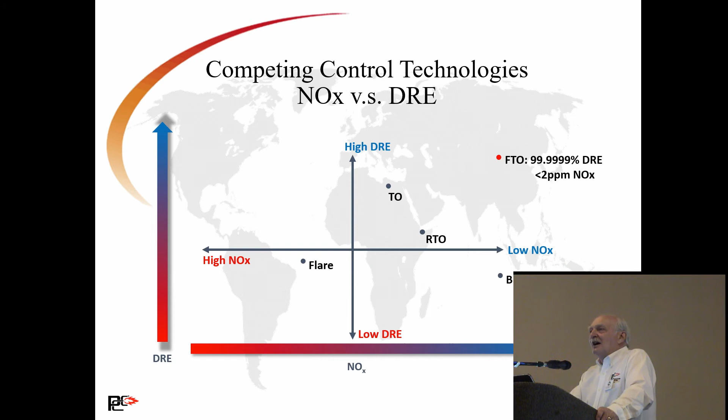underserved market. It's a market that we're educating, and the other suppliers are educating the industry into the capabilities of the flameless technology. So there's been a resurgence of an old technology in the past couple of years, and it's really taken off. There are a lot more people looking at this for various reasons.

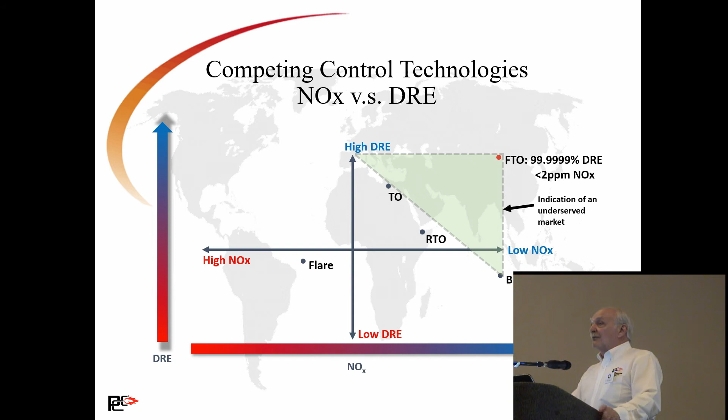The question is, what is the oxygen content of the effluent or the treated material going out of these thermal oxidizers? It's going to vary, depending on what the compounds are. In a thermal oxidizer, it's going to be lower. In an RTO, it's going to be lower because you don't require as much oxygen present. In an FTO, you require more oxygen—10 to 12% by volume versus 2%. So you're going to have a higher oxygen level coming out. A lot of that's going to be oxidized during the heat, but it's going to vary really on the compound, so it's hard to throw a number out there.

So you couldn't use it as preheated air for a boiler or a gas stove or something? You could if the compounds were right, and we've done that before. Once again, it all comes down to what the compound loading is. What are you treating? Because that determines so much of what is going to be discharged through the system.

Yes, couple of questions. So if you have a chemical stream that has nitrogens and sulfurs in it, which one would you recommend to mitigate the NOx? It has what—now, what were the compounds? Like a refinery, if you have nitrogens and sulfurs in it. Probably, in most cases, I would recommend a thermal oxidizer, recuperative or non-recuperative. They have the most flexibility, can handle the most diverse compound loading.